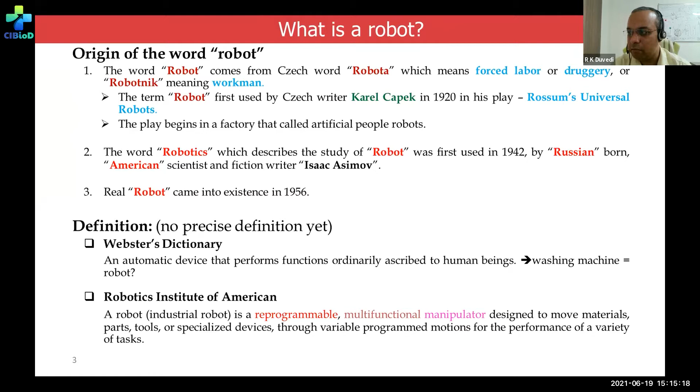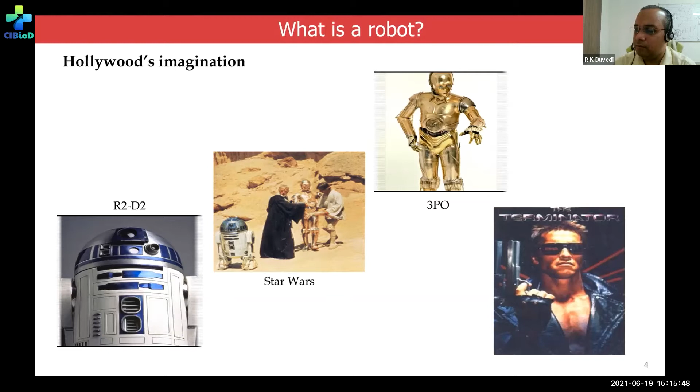There is a history, like there was some fascination created by Hollywood about robots of this shape, that shape, this application, some humanoid forms. Then some robots appeared like humanoids, and they can be programmed and accomplish operations which look more or less similar to what a human being can do, like Terminator. These things also were worked on later, and then Asimov and other robotic devices came up subsequently, which we'll just discuss.

If we want to call something a robot, the device must be able to sense and perceive information from its surroundings, carry out different tasks like locomotion and manipulation, and then it should be reprogrammable and functionally autonomous.

The best part for nowadays, like Industry 4.0, and the next level, Industry 5.0, is that the robots are not to be put into cages where they work in a distant place. They should be put in the workplace where human beings work, and then they can interact with the human being, and we can avoid a robot getting hurt, and also avoid robots creating any injury to the human being. So there are force-sensitive robots already deployed.

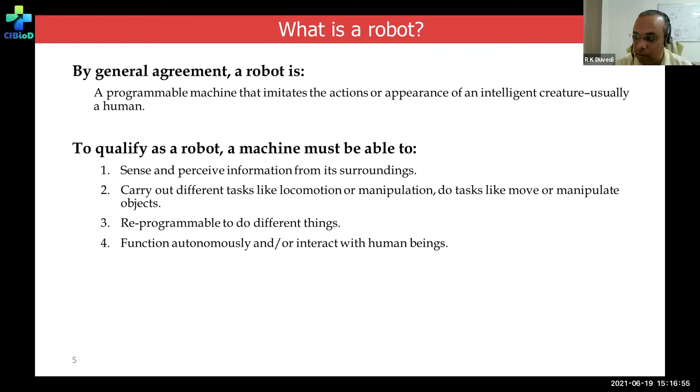I heard there's a company called Universal Robots who have deployed 50,000 such robots which are Industry 5.0 level compliant just last year. So these are some early developments in robotics.

This is the crude robot developed in the 1970s from Puma, and they had several series, 400, 500, 700 series, for 4, 5, 6, 7 axis, generally 6 axis.

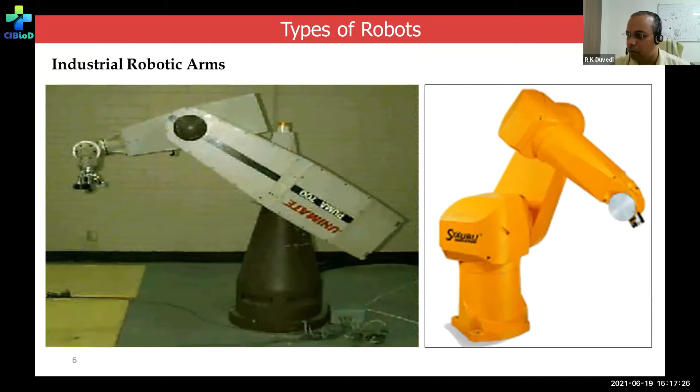These robots were used mostly for machine loading operations, pick and place operations, spray painting, and other repeated operations requiring a high degree of accuracy and repeatability, so they could keep working all day just to save on cost and human labor.

So there's a company, for some of you who would like to see the applications, there's a KUKA robot which is very famous for industrial applications.

And then mobile manipulators. So basically robot now doesn't remain stuck to anthropomorphic applications like human arm applications. We have mobile robots, aerial unmanned surveillance robots, UAVs we call them, and drones and all those things, which can be independently programmed, and they can independently operate for a while. So all those automation devices can be called robots.

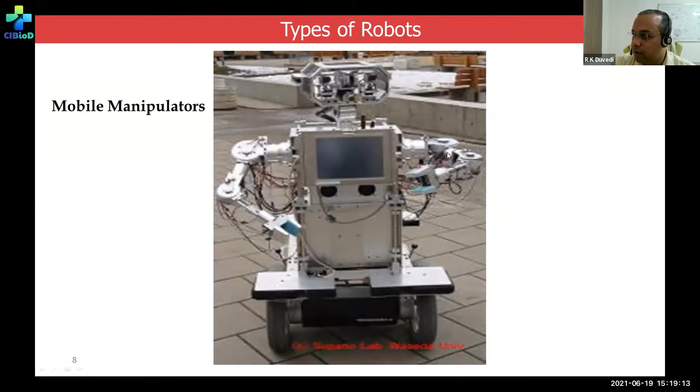Here you can see this robot is on a mobile platform, plus simultaneously it has two, left and right, hand arms. And then there are some devices which are aerial robots, humanoid robots, wheeled mobile robots, legged robots, underwater robots. There's a company in California which develops robots for underwater exploration, where the robot can go deep. I heard something even close to 1.5 kilometers down.

And these are robots which were used in a rescue operation, I think two years back, when some people were stuck in India in some mines and there was water logging, something like that.

So there's a legged robot. Some people have started using them as pets, and they are also being used in some competitions, like competitions where the robots can play football and kinds of things.

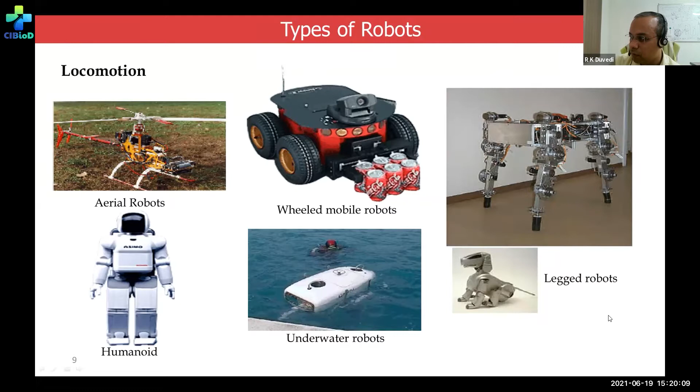These are legged robots, an application from Boston Dynamics, where you would have seen some robot which appears like a horse, or you can say like a dog, which can move over the stairs. It can jump and it can roll over kinds of things.

And then there are some industrial robots which are used in nuclear reactors and other applications for material transfer, and also in warehouses.

So these are the mobile platform robots. They can sense things in the surrounding. They have vision cameras, infrared cameras, some ultrasonic attachments, and these robots can be moved along a programmed path, or they can also self-navigate, and they can also be remotely controlled.

And similarly, you would have seen the best example which is known to many people around: the NASA and JPL Mars exploration robot.

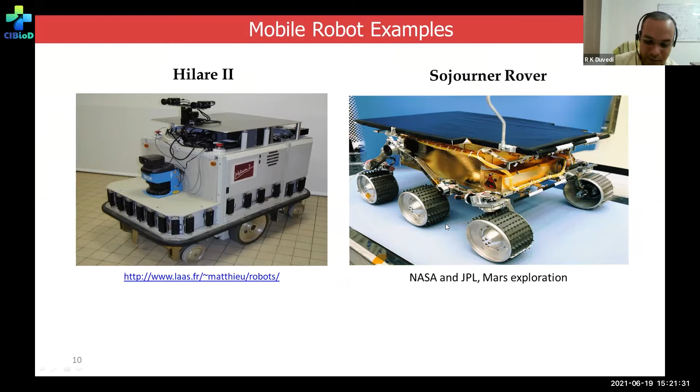So there's a company called iRobot. The fellow who owns that company, or the CEO of that company, is the one who did his masters and created some algorithm way back in the early 80s or 90s - I'm not sure, it should be the 80s. So his algorithm was the one which was used to create or develop the entire platform for the NASA exploration robot, the Mars rover.

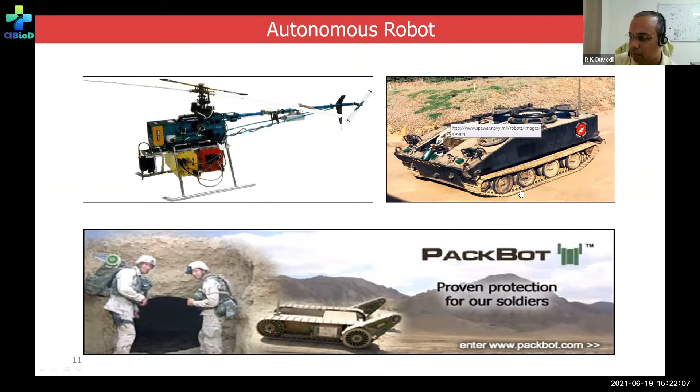And there are some applications which are military applications, where you can create some robotic devices for launching into enemy territory. You can get some visualization about their activities, and you can navigate through narrow paths to plant certain devices into different locations where sending a human being would be very unsafe. And we have some tanks and armored vehicles also of high capabilities, which can also be remotely programmed, and they can also be called robotics.

Humanoid robots, we have seen a couple of these even during COVID. They were assisting in various hospitals for facial recognition, or capturing the data of people entering the facility, and also taking parameters like temperature using sensors on the robot. That data can be put into the system before allowing someone to enter the facility for further medical examination. And of course, restaurants were also good customers for such technologies.

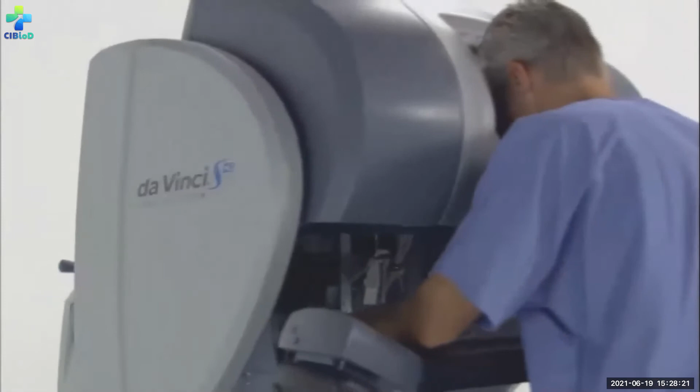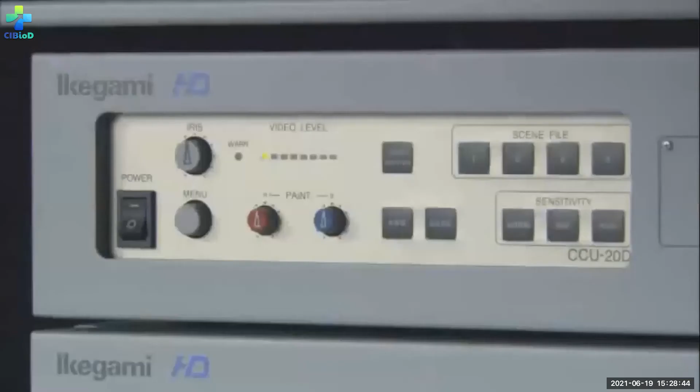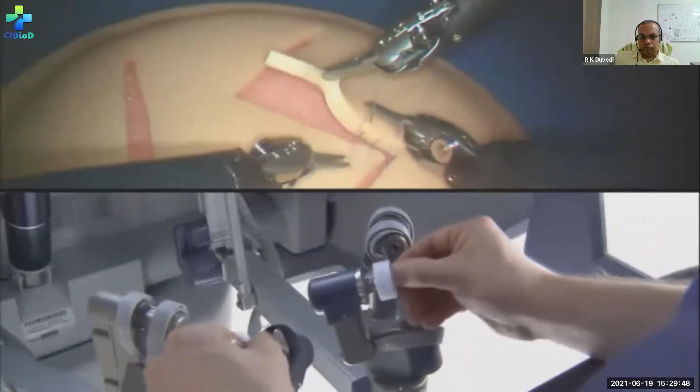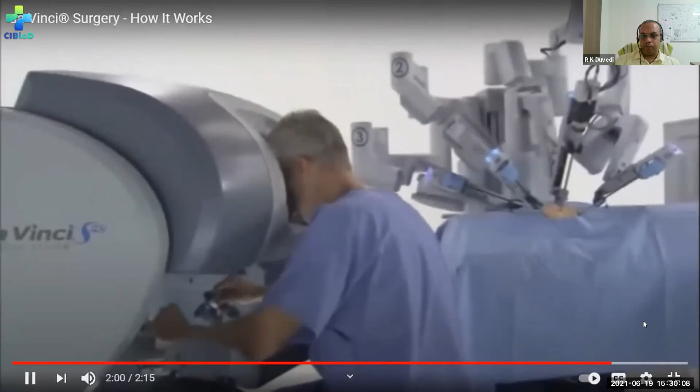And intuitive motion control enable the Da Vinci surgeon to transcend the limitations of conventional surgical technologies. Three components comprise the Da Vinci surgical system: an ergonomic surgeon's console, a patient-side cart with 4 interactive robotic arms, and a high-definition 3D vision system. Seated at the console, the Da Vinci surgeon views a remarkably clear 3D image of the surgical field. The system scales, filters, and translates the movements of the surgeon's hands on the master controllers to 4 interactive robotic arms on the patient cart. The precisely controlled micro movements of the Da Vinci instruments are enabled by the computer processors of the system. These dedicated processors perform millions of safety checks for surgical precision and control. Da Vinci EndoWrist instruments are designed with a unique wristed architecture that provides 7 degrees of freedom for range of motion greater than even the human wrist. This proprietary design enables surgical maneuvers impossible with conventional laparoscopic tools. The system requires that every surgical maneuver is under the direct control of the surgeon. Redundant safety checks prevent autonomous movement of the instruments or the robotic arms. The Da Vinci S surgical system moves surgery forward with a new level of technical capability that enables minimally invasive and complex procedures as never before. Da Vinci provides a streamlined surgical experience that benefits the hospital, the surgeon, the OR team, and, most importantly, the patient.

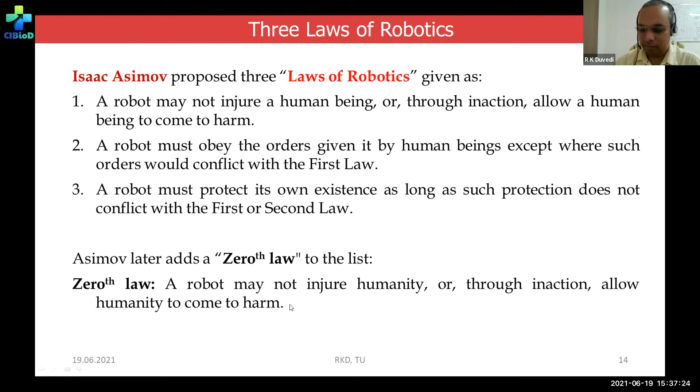Applications for military use and rehabilitation are still coming up, but they are in good hands, saving humanity. The basic applications of robots are for dangerous, dirty, dull, difficult, and repetitive tasks, and ones that are now too expensive to carry out with a human being.

If you talk of Industry 4.0 or Industry 5.0 compliant systems, the robot should be able to work with human beings in close interaction. The sequence of operation and the workspace should be so safe that just touching the robot, it stops, and it starts following its path thereafter once it senses the human being is no longer there.

This requires a whole lot of integration, of course vision systems, force sensors, AI algorithms, and a knowledge base using which the robot would be initially programmed with its capabilities. There's also compliance, like energy compliance, and easy disposal of these devices after their useful life.

Generally we use robots or automation devices to increase product quality, or the quality of operation with respect to medical applications, so consistency can be retained. There can be a good day or a bad day for a medical practitioner where he's not as energetic, or some days he's extra energetic, and just to retain the competency level to an anticipated benchmark, we can use gesture controlled robots, the way you've seen in the Da Vinci system.

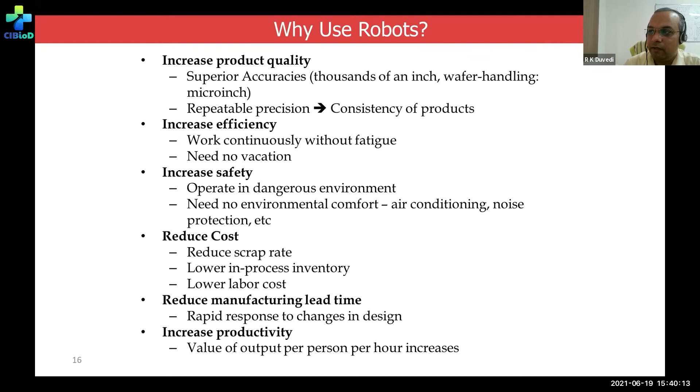Of course, there's increased productivity, so the per day value addition or per unit time value addition can be enhanced, and people can make a better life, spending less time on work and more time on self development.

I heard one gentleman saying that the payback period of the robot is less than 1 year, which is far beyond the expected trend in the industry, where generally 4 to 5 years are there.

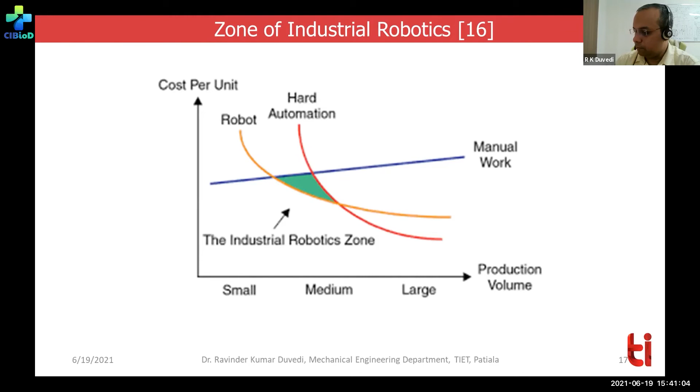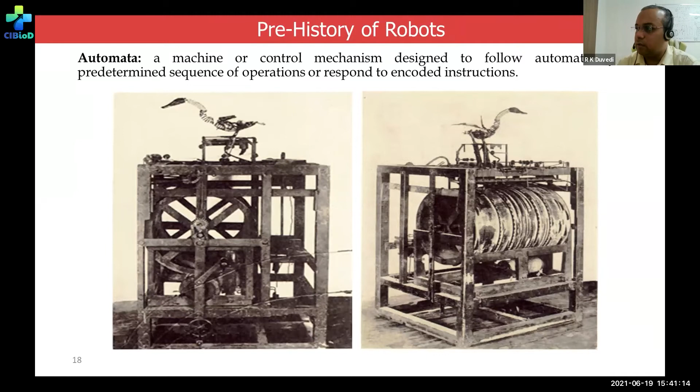Now we have some history. Robotic development was basically for some industrial applications to automate. Initially they were mechanical automation, and then starting in 1961, George C. Devol got the first US patent on robotics, patent number 2988237.

Subsequently, because of numeric control technology and computer technology integration with remote systems, CNC, DNC, and a number of other things came along. Then with the advent of technology, computer technology becoming cost effective over time, storage technology, AI, and haptic applications took the entire system to the next level, which is totally beyond what came before.

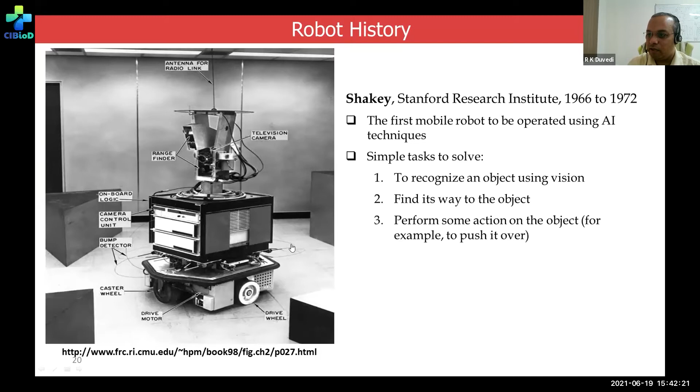If we talk of such a robot, if somebody develops it nowadays, it would be called a primitive age robot. But things evolved from here, not so far back in history, picking up to a very high next level, so we have very high HD and high range cameras and all those things. This is the Stanford cart, which was on a mobile platform.

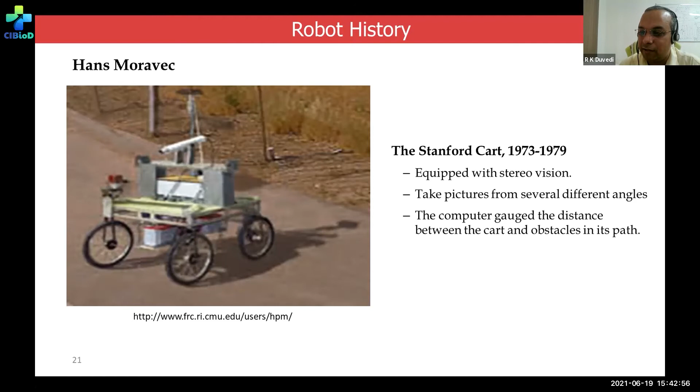It's not a day's task. There are many things which slowly got refined and then added up. We have some cars and technologies, like Tesla claims self-parking vehicles and other things.

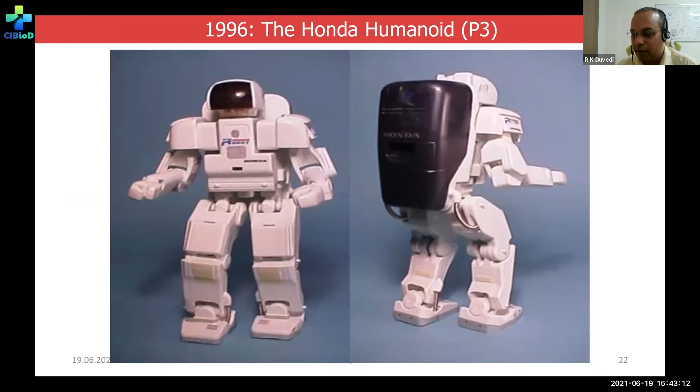So we have humanoid robots which can walk like a human being, avoid obstacles, bypass obstacles on the floor, have a vision sensor, and can also interact. There are also other versions of this, like Honda is still working on.

Then we have this Pathfinder, which was sent to Mars. Now you see the technology used to maneuver the wheels on the ground. This chassis has every wheel independently working, with actuators making them rotate, and actuators making these limbs keep the upper platform stationary or oriented in a particular orientation, even though the robot is working on different rough or plain terrain.

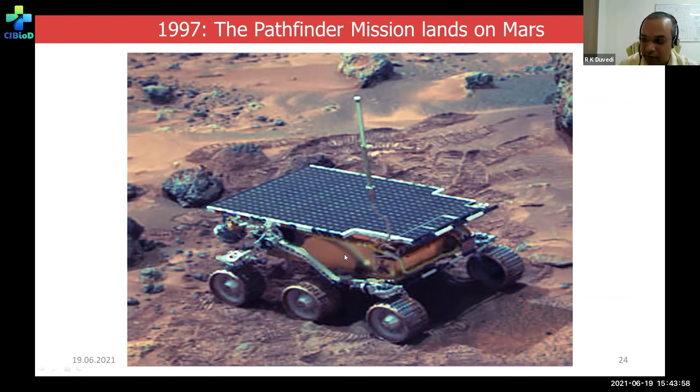In fact, the aerial vehicles, unmanned aerial vehicles, and drones have various actuation systems for roll, pitch, and yaw. These motions can be independently controlled by making the rudder or wings change their position according to the velocity with which it is moving. So all those technologies, like how the actuators move which part of the device and how it takes shape, are still being tested, but they have also reached quite a good level.

The degree of freedom of a robot is basically as many independent motions as we can have. For example, on our human body, if we stand and freeze our feet on the ground, we have a waist which can rotate about the vertical axis, and a shoulder which can go up and down - that's another degree of freedom. The shoulder has got 3 degrees of freedom: it can roll over, move left and right, and move back and forth.

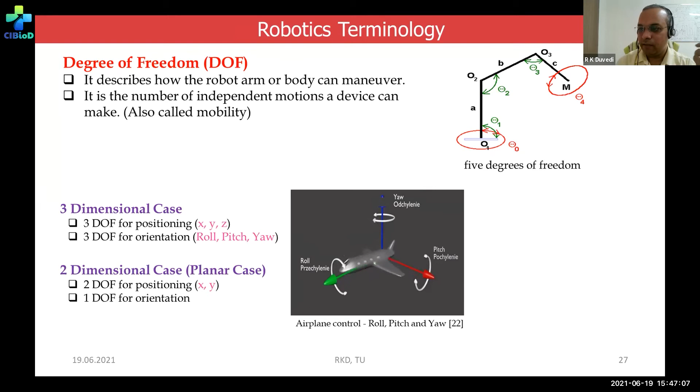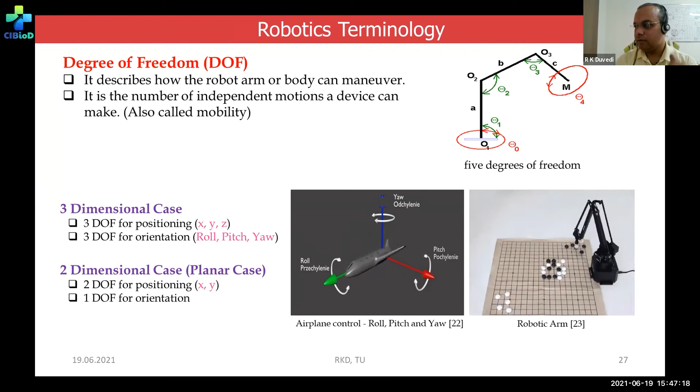Here you can see a robot with a vision system separating white and black balls. So color recognition and similar things can be done.

We have another terminology in robotics: the space around which the robot is able to move. If we look at ourselves when sitting, our hand cannot move everywhere - it can move from a position close to our chest to a maximum reach position when the arm is fully extended. We cannot go beyond that maximum fully extended arm position.

We cannot penetrate ourselves, but within this range we can have very good consistency when working close to our body. When we have the arm fully extended, we may not perform as well as when working close to our body, like the workspace just in front of our chest.

So there are some positions within the total workspace which are of very high interest to us, where the hand can manipulate itself in many directions with sufficient distance along the XYZ directions. The overall position in space within which the robot is able to work is the workspace. So when we select a robot, we take care of whether we need a smaller or larger robot, and whether it can execute straight line or curvilinear motions.

And then the orientations - whether the robot is working from a tabletop position, or is to be mounted on the rooftop, or wall mounted, and what are the orientations. And of course the orientations of its own linkages also.

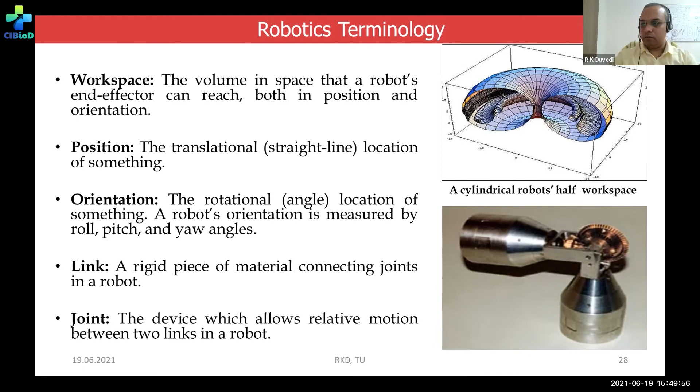So we have a motion here, and muscles give energy here. If we have a mechanical system, we need to put a motor here, or the motor may be put at the base, but there may be some chain or belt drive system which will make the two things move relative to each other. So this would be frozen, and the upper arm can be moved - something similar to this can be executed.

So speed of operation - we can just touch upon the load bearing capacity I talked of. And the primary objective is that we have a robot which should be able to work with the required accuracy. So what is accuracy and repeatability? I will just touch upon that.

Accuracy means we always have some target discrete location in space, in digital technology. We cannot move like in analog technology where the robot would be able to move everywhere in the workspace. So those discrete locations may be as close as possible, like 1 micron, or they can be 1 mm or half mm apart from each other. But once defined, ideally the robot, when commanded to move to or maneuver through those positions, should be able to do that.

So if the robot is targeted to go to this location, a small discrete location in space within the workspace, and it goes there or stays very close to it, we say it has very high accuracy. If it stays away from the target location but not too far, because some sensors may not be as precise, the accuracy is relatively less. Here the accuracy is better. This is a relative definition.

If we target our robot to move many times to a given position, and all the time it stays very close to the targeted location, we say it's quite repeatable - the repeatability or reliability is better. But if it haphazardly moves left and right at several positions, we may say the repeatability is poor, and accuracy may also be poor.

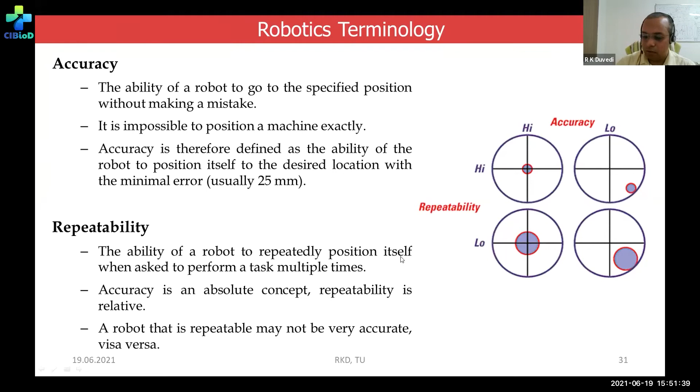Then we have the various end effectors, the tools which we put onto the wrist. The wrist may have up to 6 degrees of freedom. We may have shoulder, waist, elbow, and then minor degrees of freedom called yaw, pitch, and roll at the wrist. At the wrist plate, we mount the tool, which may be a sophisticated hand with many fingers able to move independently, or some gripper which has just 2 sliding fingers.

There could be other tools and things which can be mounted: mechanical grippers, vacuum, magnetic grippers, adhesive hook scoops, and spot welding, arc, spray painting, rotating, and n number of applications for various things, like some vision sensors for UAVs, some touch sensors, or some other ultrasonic sensors for mine detecting robots.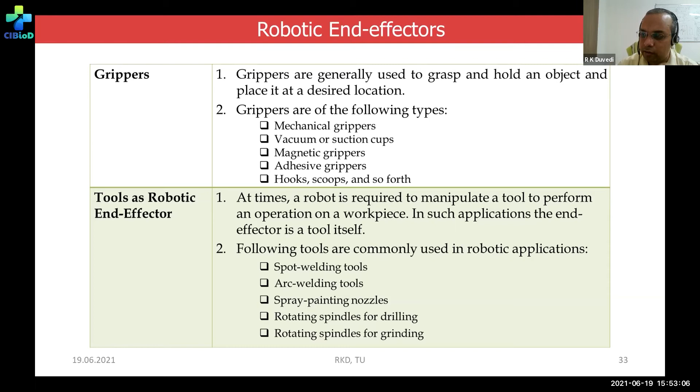For temperature sensing, we may have a laser gun mounted and a laser sensor. And for medical applications, we may have a scissor, or maybe a camera, or maybe some catheter, or whatever tube or passage is to be used. So there can be n number of applications, but all those would require a small tool to be mounted at the robot wrist.

Of course, like the spatial resolution, the accuracy and repeatability. The spatial resolution is how close those small discrete locations within the workspace are, through which the robot can move. The closer they are, the better is the accuracy and repeatability.

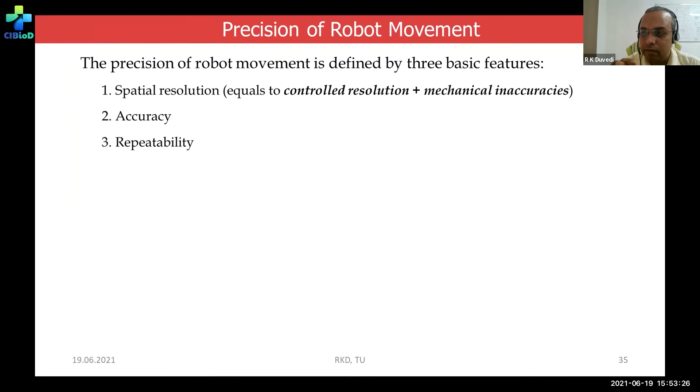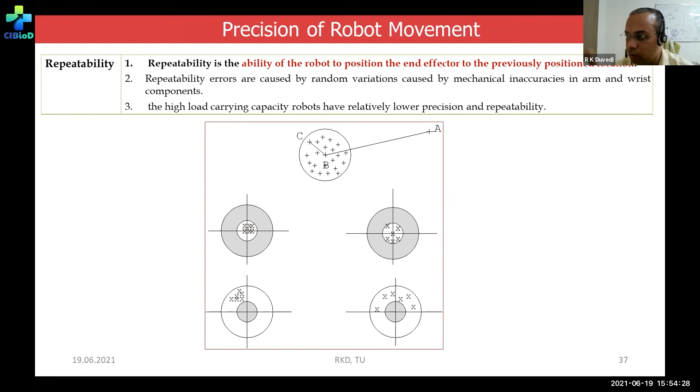There is always a sphere of influence within which the robot has to remain, because the sensors are there. The moment the robot moves too far away from the target location, the robot controller is required to act and bring back the robot near or in close vicinity of the target location using the feedback control system. So that is always there.

There are different types of joints in the robot which are mechanically used. We can have linear motions using the piston cylinder arrangement, we can have hydraulic systems for the larger robots, and we can have rotary joints where the axis is perpendicular to both the links and this can swivel left and right.

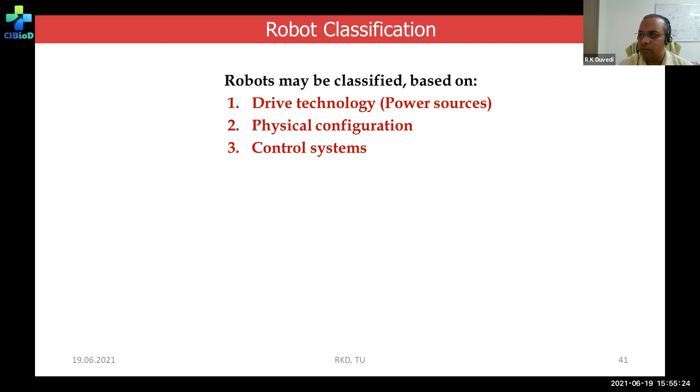So there are different classifications based upon the drive technology, like the power source, either electrical, hydraulic, or pneumatic. The physical configuration can be Cartesian. We can discuss the electrical technologies, and we can use different kinds of actuators: hydraulic, pneumatic, stepper motors, servo motors, muscle wires, DC motors, hydropneumatics, electrical actuators, or pneumatic motors.

Pneumatic motors: we just apply the compressor and then they rotate, but they're used for high RPM operations where the torque requirement is also less. So these are the various physical configurations, generally, based upon which we can configure the robot and say which configuration it is.

So the first one is basically the Cartesian, where the robot can move linearly. It can move up and down, left and right, back and forth. These three directions of motion are linear as well as perpendicular to each other. So this is the Cartesian configuration, similar to one of the milling machines, if some of you know what that is.

Then there's cylindrical, where one of the joints can move up and down along this vertical link, as well as move about this link. And then there is also one translatory axis here, or linear motion.

And then there's a polar configuration, like the upper part here, it can swivel about this vertical axis and then roll over, rotate about the horizontal axis, and then there's an arm which can move back and forth, like in automated cranes, we can see this kind of example. And then there's a jointed arm, where there's a shoulder joint, elbow joint, and waist joint.

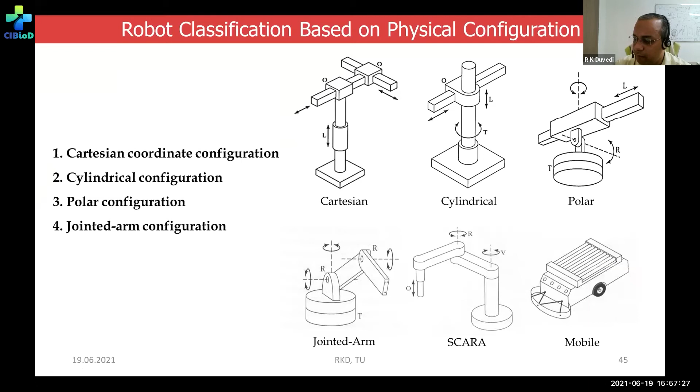So we can actuate and do the task. The SCARA is a robot which is used in the electronics industry very frequently for high speed operations. And then there are the mobile robots.

I'll just quickly come to some applications which I have figured out for us for today's discussion.

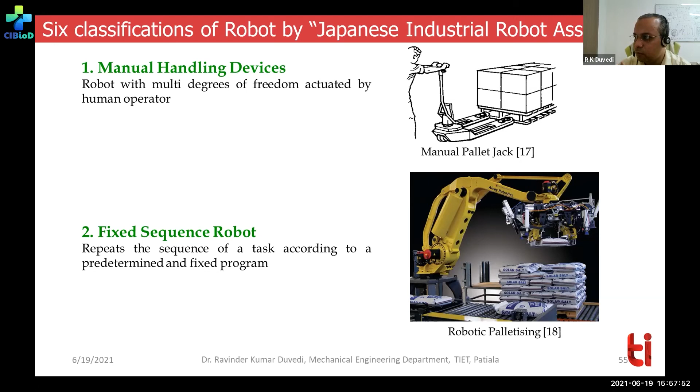Robots can also be semi-automatic devices to assist in manual handling of devices. They can be fixed sequence robots, like we know where to pick and where to place, as in industrial robots in cement industries or in other packaging industries.

There can also be robots used for variable sequence of operation. For example, you may have a conveyor on which parts are received in various orientations, and we need to stack them in a particular orientation, so we can have a variable sequence of operation.

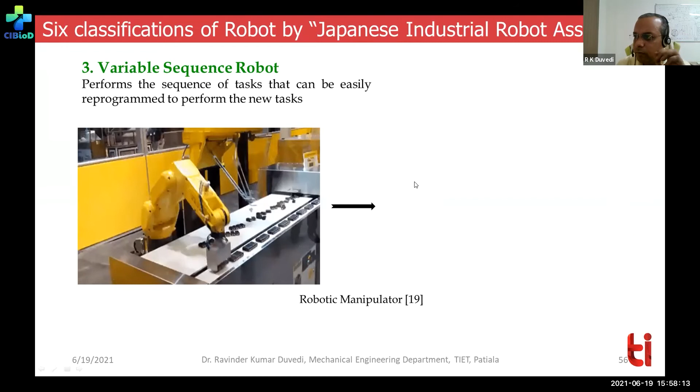Right. So is it visible to all of you?

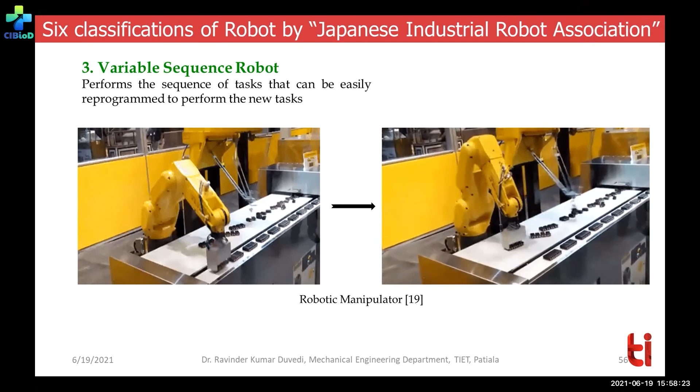Yes sir. Okay, and then the playback robot - we can use our hand and program the robot with the profile along which it should work. All those positions and speeds get recorded in the controller, and then we can make it move all the time.

The Da Vinci is the highest extent of a playback robot, where the doctor is simultaneously doing something and also feeling what is happening on the other side. When we pierce through something, there is a small force which our fingers experience, making us conscious not to penetrate with high force, or in certain cases when the needle doesn't penetrate, we exert a little more force. All those small forces can also be experienced by the doctor, who is not directly touching the patient. That is another highest extent of this kind of robot.

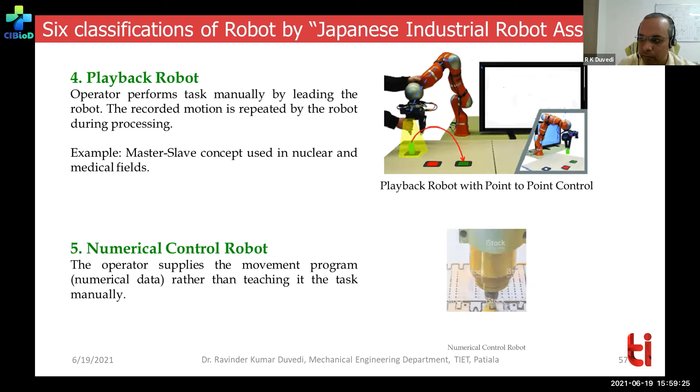Here you can see these applications: numeric control robots where we program it and just let it run, and a hard program is followed, like cutting, welding, and soldering operations.

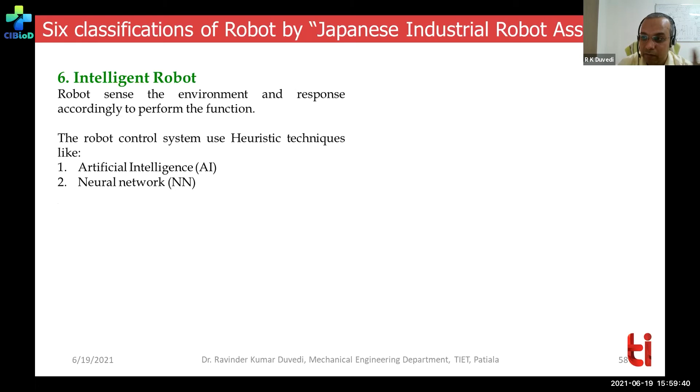There are intelligent robots where they can also make some decisions themselves, for unique situations that are not programmed. So we may use AI, neural networks, or fuzzy logic, and genetic algorithms - those robots can make use of these algorithms.

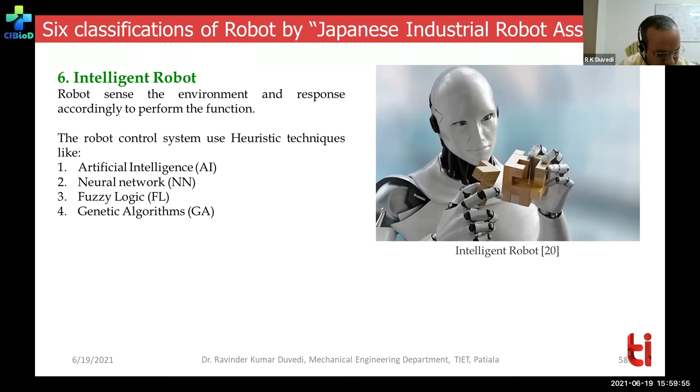We have also seen - I forgot the name of the robot which started speaking, the speaking robot - I think it was named Sophia or something.

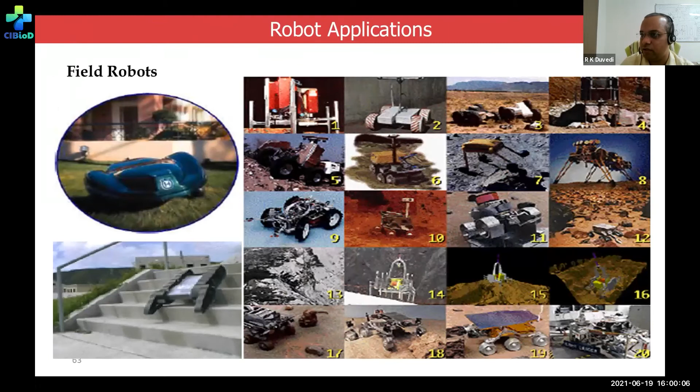Nowadays people have started using even home cleaning robots, and robots for electric charging or positioning the petrol or diesel nozzle for refilling. And then robots for some cleaning operations, for orthopedic surgery, and robots for the manufacturing industry where they work within an integrated automated environment.

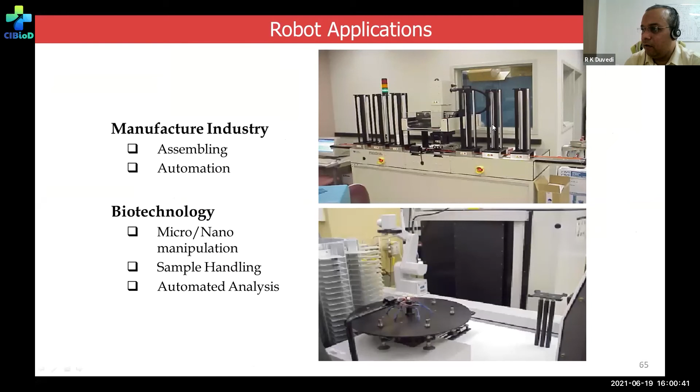We also have robots for various military applications, for coordinated covert applications, where robots work in remote locations near enemy positions. Drones also send data - some people remotely capture that data on their screens, and then let the people on the ground or the soldiers know what to do next and where to move. So those coordinated applications can be there.

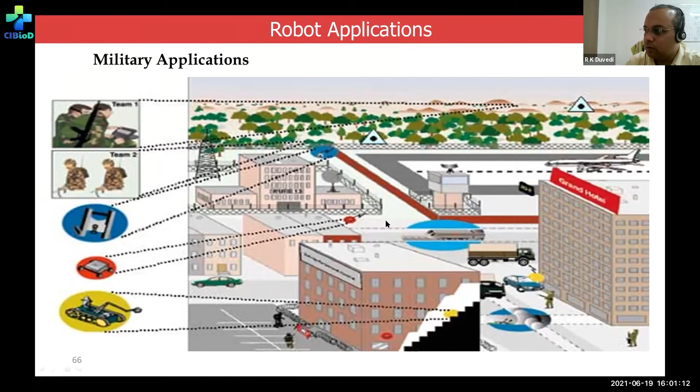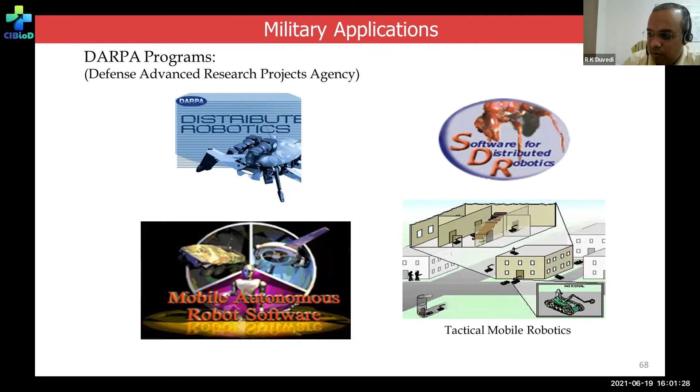In fact, for mining - for locating mines - and of course other military applications. DARPA is the organization in the US, if some of you would like to see, that develops very high-end technologies, for firefighting, rescue operations, and space robots, which we all know about.

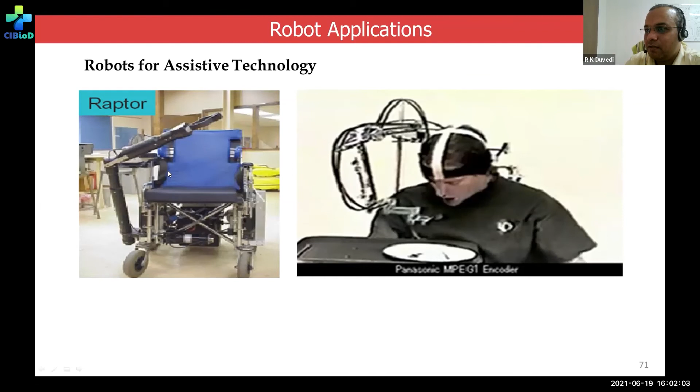Robots for assistive technologies have been developed for cases where someone is not able to use their hands. A robot feeds this man, with signals picked up from the muscles or from interactive intuition with an external camera, like eye movement or neck movement, programmed to give various positions to the actuator so he can pick up things from the plate and put them into his mouth.

Some robots assist disabled persons, for example to help them get out of a chair. There are also new applications for rehabilitation, like muscle fatigue or toning up the body, or training someone on military equipment. MIT has developed a robot device that is loaded around the limbs of the human being, with programmed motion moving those limbs in a coordinated way to provide muscle strength or assist rehabilitation.

There are other such devices. This is robotics for rehabilitation, a recently published review paper discussing various technologies developed across the globe by different people, for people without limbs and for people to assist their weak limbs in carrying heavy loads, like Rex.

These technologies are being developed by DARPA for US military applications, where a soldier would be able to lift or pick up a load of maybe 100 kilograms and go to any terrain. The person will not feel the load, but charged batteries will actuate the various links. The robot will just sense how the person is trying to move, while the entire load being carried is transmitted to the ground through the physical structure.

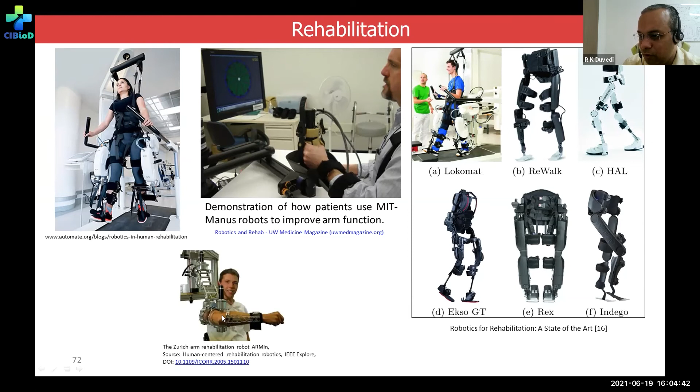These devices are used for rehabilitation, for helping older people whose muscles cannot support their own body, and for other applications like military use, where they want to carry ammunition or rations to inaccessible regions where vehicles cannot go. The Zurich arm is also used for rehabilitation, for toning up the muscles of athletes who use their shoulder or elbow frequently.

Then there's digital surgery. I showed you the application of Da Vinci - this is the Da Vinci, the Stanford robot in operation, which we've seen in the video, and this is also part of that video I shared with you earlier.

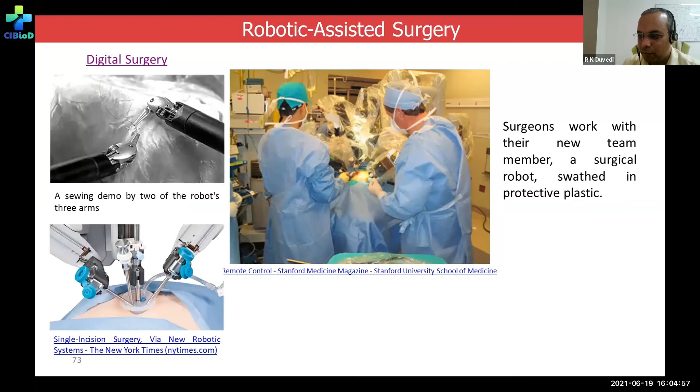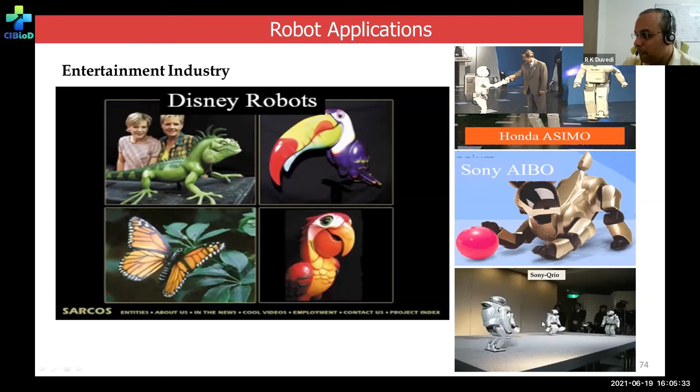In the entertainment industry, Disney has used robots of different kinds and shapes in their amusement parks. Then there's ASIMO - initially developed with the idea of a huge market to deploy robots in place of pets, though there's a different kind of interaction with pets. Nonetheless, these are also technologies - Sony Aibo, Sony Qrio, personal robots, and cleaning robots. There are many advantages of using robots, and of course a couple of disadvantages.

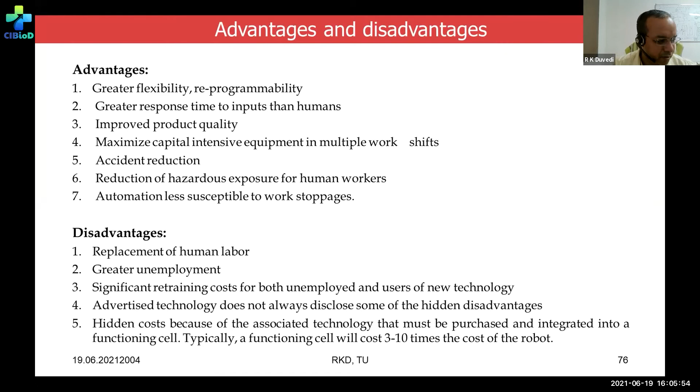To summarize in a single line - through a LinkedIn forum I'm connected to, I learned that big companies like BMW, Chrysler, Google, and IBM are now working together to develop technologies that demarcate what automation can support best and where human beings support best. When there's tremendous input required from a human being, where the know-how is not previously known, there's no knowledge base, and the decision must be made based on judgment, then humans are the best at it.

AI technologies can assist us, but most of the time they don't give us foolproof results. Similarly, automation assists us in reaching beyond our physical abilities, like load carrying capacity or performing operations continuously for longer hours, since a person may become mentally burdened repeating tasks for years and months. Some tasks are still designed to require human specialists, like always needing a doctor to perform surgery using Da Vinci.

Da Vinci will never be allowed to perform an operation in isolation, so we always need an expert. We will give them the best devices, which can be deployed at strategic locations along major cities of the country, where specialists, if required, can operate upon those people without wasting much time. Similarly, we would have automation devices to assist us in terms of fatigue or going beyond normal human capabilities.

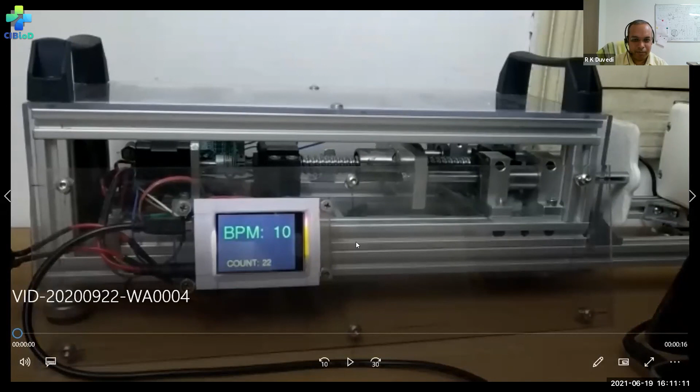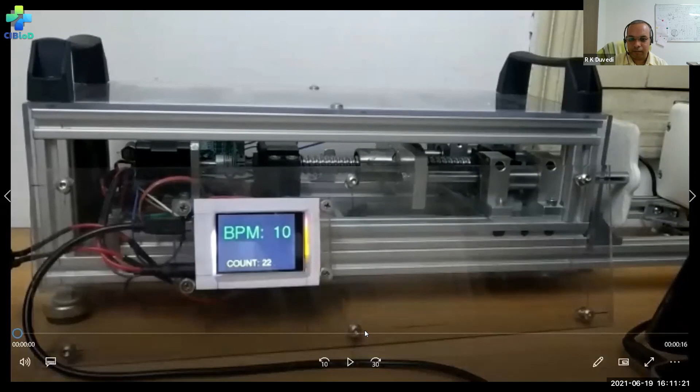Can you see my screen? Yes sir. This is one of the devices which we recently developed with the experts at PGI, of course like Dr. Saab, Dr. Virender Garg, and Dr. Babita ma'am. This is the one which we are still working on to give it some final shape. Let me play this.

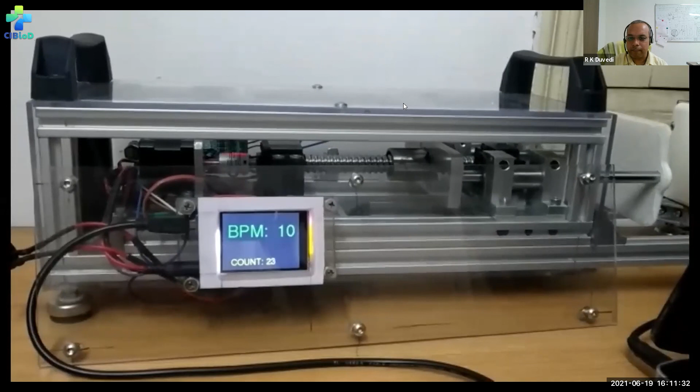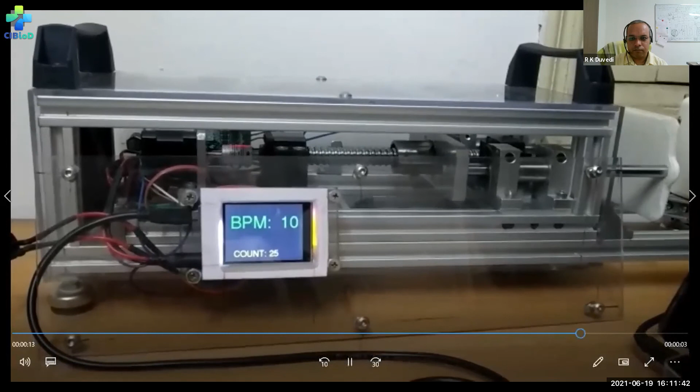I think there is some other video, let me see where it is. Screen 2, screen 2, screen 3, screen 1. Can you see my screen? Yes sir. Okay, so this is just the assembled view.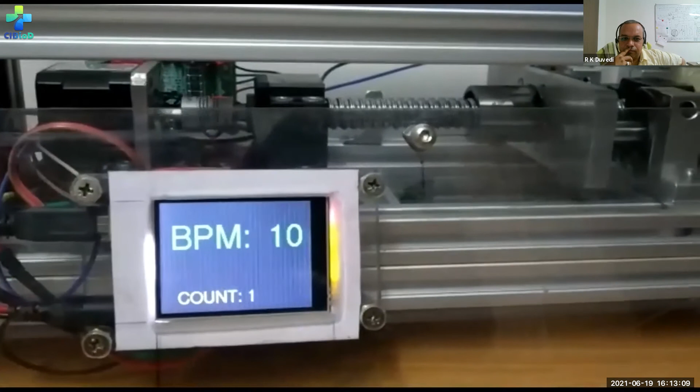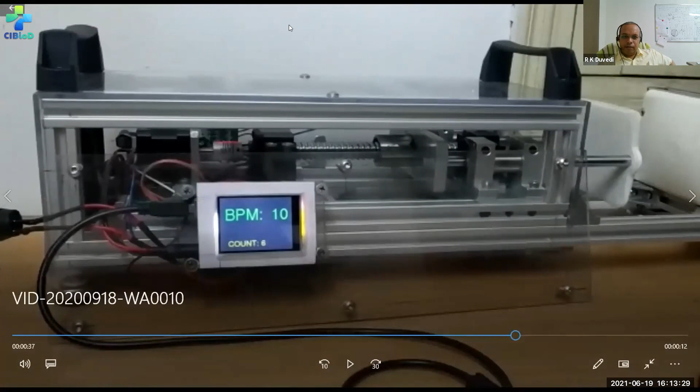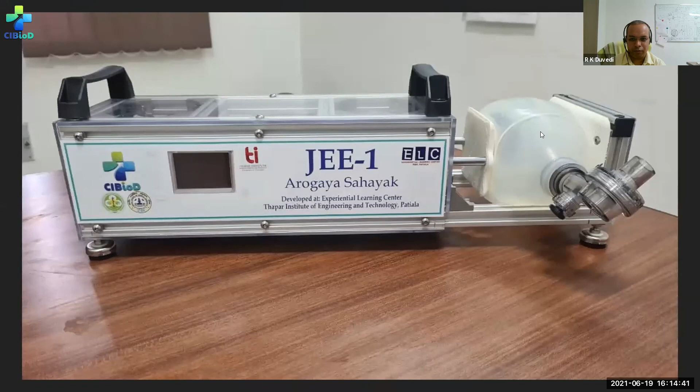So this is a device, and of course there are a couple of others which we developed. There was a smaller version of this also - this is the smaller version which we made just recently. This is a device for medical supplies, for sending medical supplies to the isolation wards and communication with patients in the isolation wards. And then we have this device I showed you for the ambu bag, which has all the required medical parameters, and this weighs around 6-7 kilograms only.